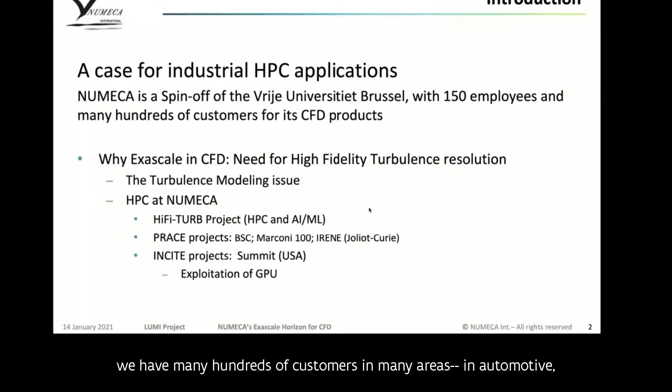So just two words on NUMECA. We are a spin-off of the Vrije Universiteit Brussels, and with around 150 employees today. We have many hundreds of customers in many areas, in automotive, in aerospace, in aeronautics, in marine, and so on.

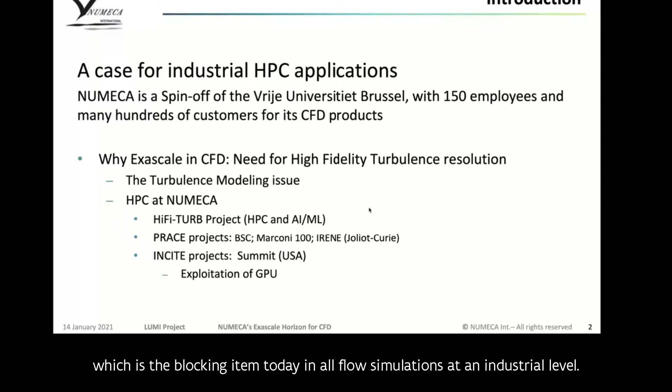I'd like to introduce first what is the issue about turbulence modeling, which is the blocking item today in all flow simulations at an industrial level. Along these lines, we have a large experience in high performance computing through our own developments and through several projects, which I will describe shortly.

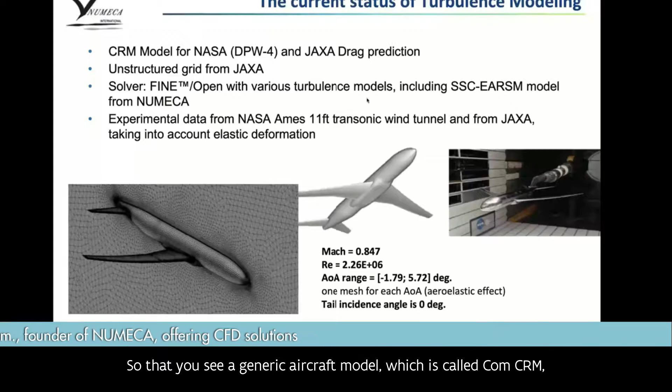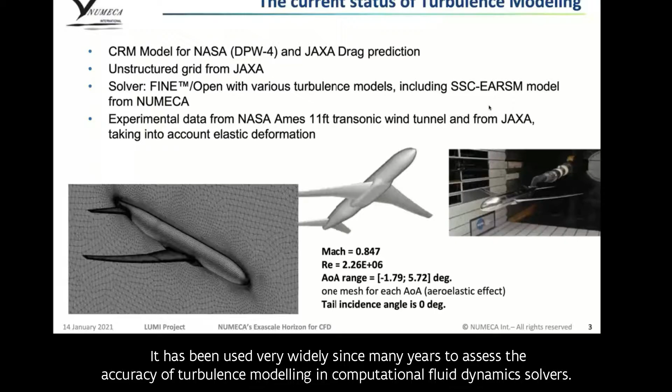Let me move on and show one example of the current status of turbulence modeling. This is a generic aircraft model called the CRM, for Common Research Model. It has been used very widely for many years to assess the accuracy of turbulence modeling in computational fluid dynamic solvers.

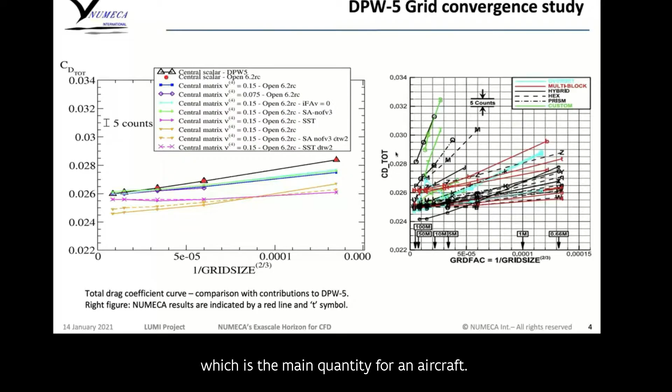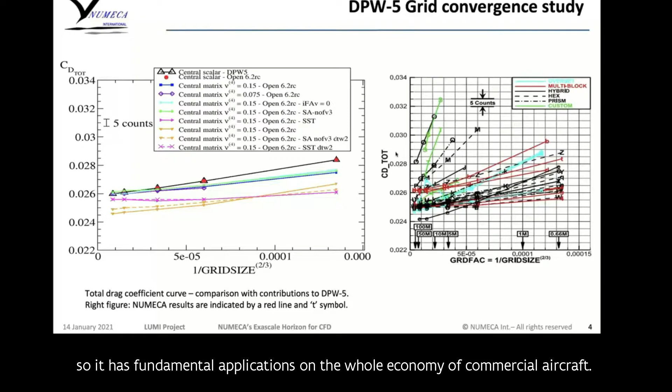If we look at this plot, the issue on the right is prediction of drag, which is the main quantity for an aircraft. The drag will determine the fuel consumption over a flight, so it has fundamental applications on the whole economy of commercial aircraft.

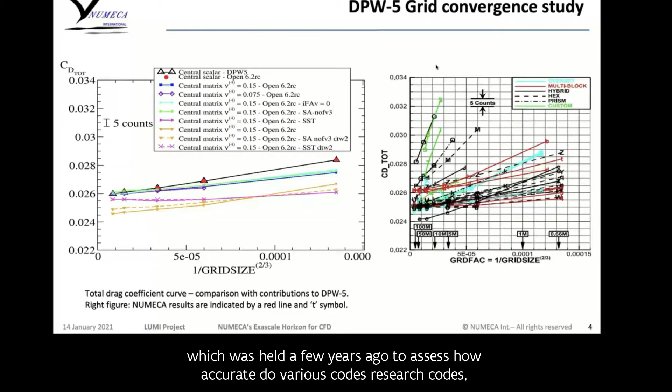What you see here on the right is the output of a workshop held a few years ago to assess how accurately various codes, research codes, commercial codes, predict the drag. You can see there is a wide variation of prediction. Each of these curves is a different code.

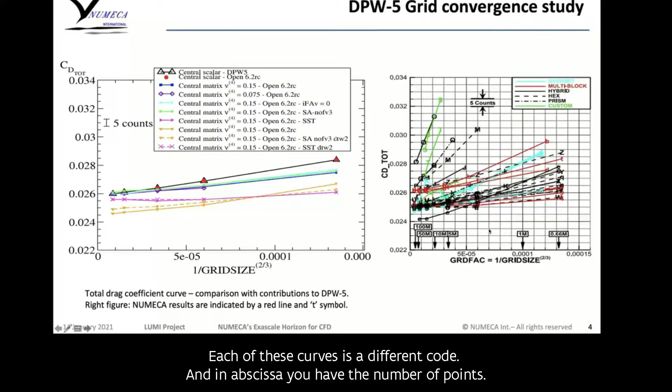In abscissa, you have the number of points. At the lower end, you have a simulation with 100 million points, and some converge. If you look at the values, not all the codes converge to the right value, to the experimental value.

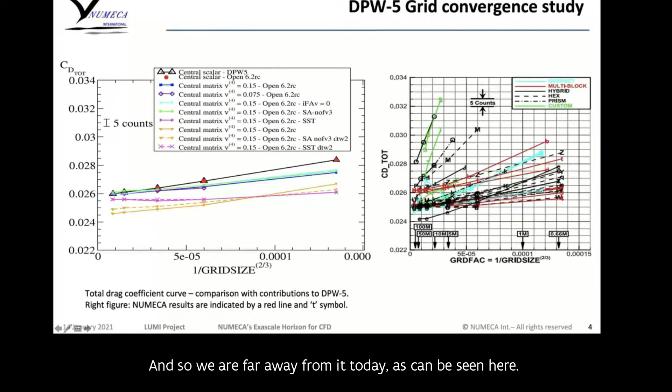To indicate the level of accuracy that industry requires, one graduation, as you can see here, is 5 counts. So 1 count on drag is 1 unit on the 4th decimal place. That indicates the accuracy required by industry, which is of the order of 1 count. We are far away from it today, as can be seen here.

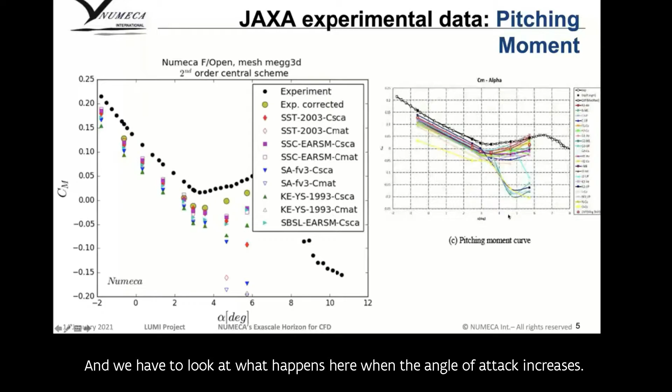If we look at the other curve, which is the moment as a function of incidence, this again is the output of a workshop, giving the discrepancy between various codes. We have to look at what happens here when the angle of attack increases, then there is flow separation.

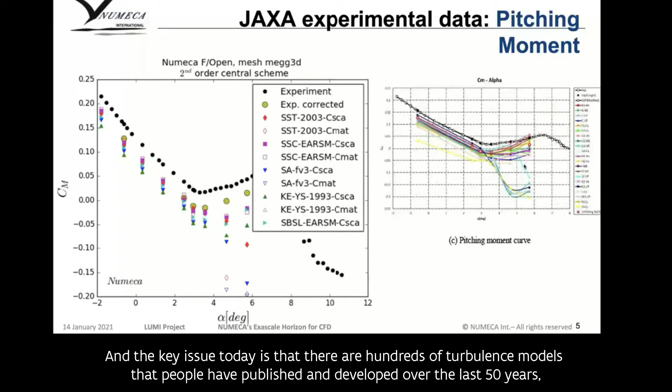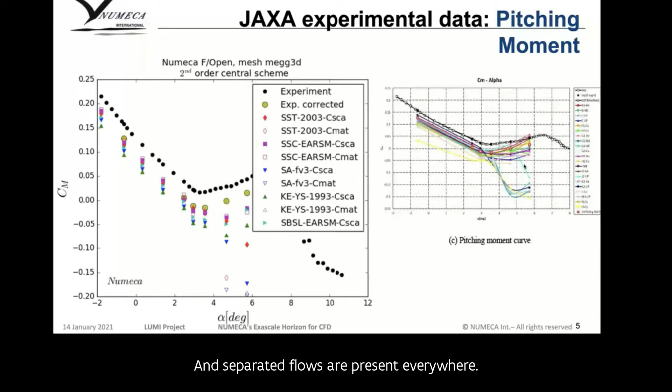The key issue today is that there are hundreds of turbulence models that people have published and developed over the last 50 years, but none of them is reliable when it comes to separated flows. And separated flows are present everywhere.

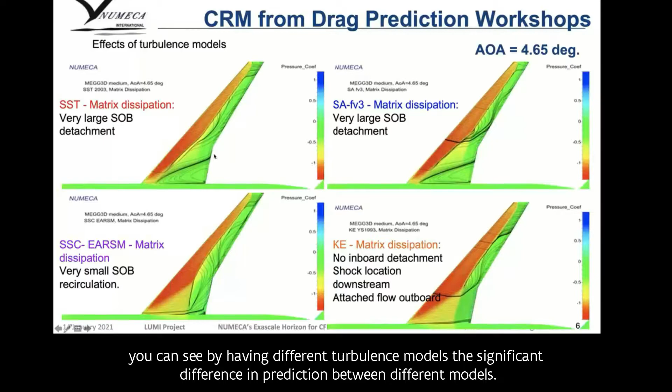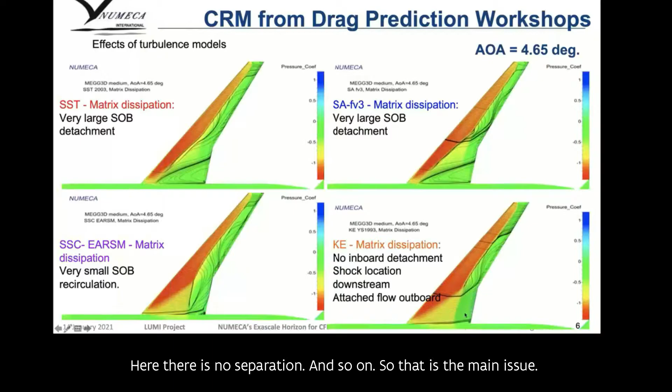If we look at the shear stress lines on the wing, you can see by having different turbulence models, the significant difference in prediction between different models. Here, this model predicts separation at the intersection between the wing and the fuselage. Here, there is no separation, and so on. So that is the main issue.

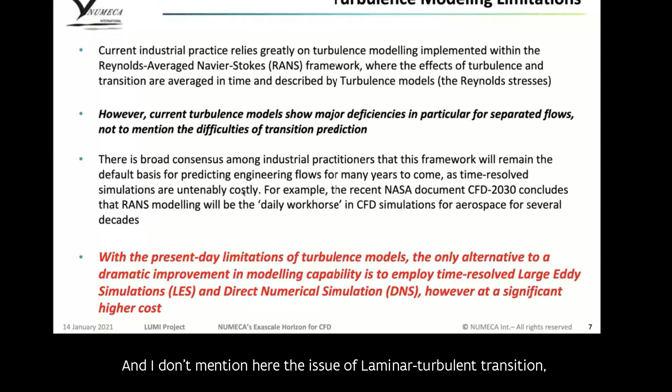So what is the way to go around these limitations, particularly with separated flow? I don't mention here the issue of laminar turbulent transition, which is also very fundamental and very difficult to model. The approach that I showed is called Reynolds Averaged Navier-Stokes, RANS.

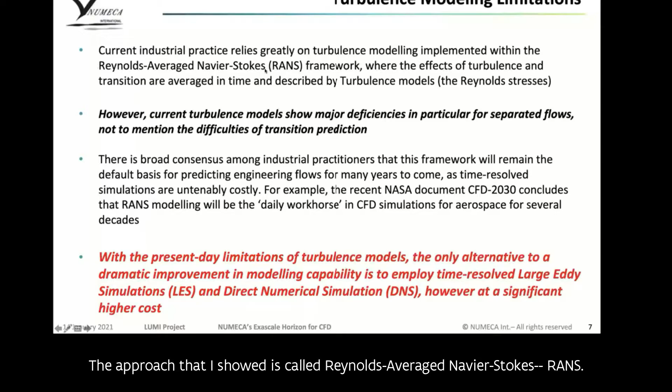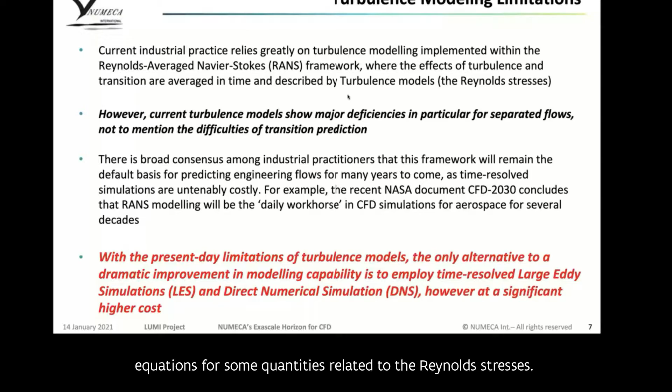This means we average over all the turbulent fluctuations at all scales, and that introduces some quantities called Reynolds stresses. The turbulence models are semi-empirical models that provide laws, or transport equations, for some quantities related to the Reynolds stresses.

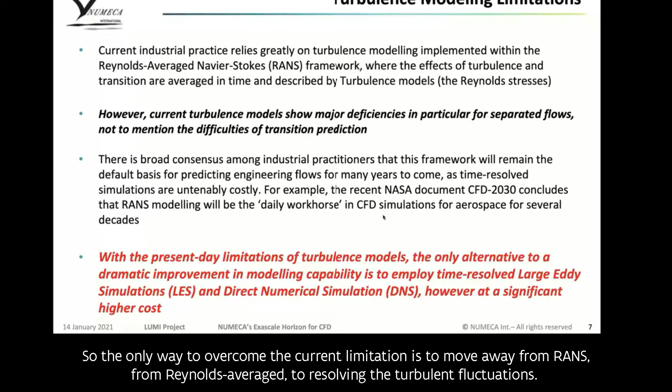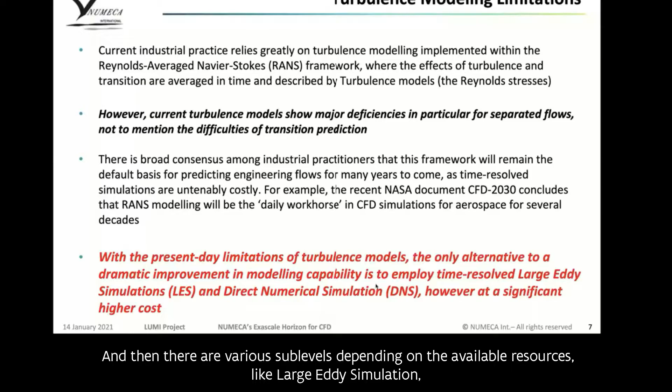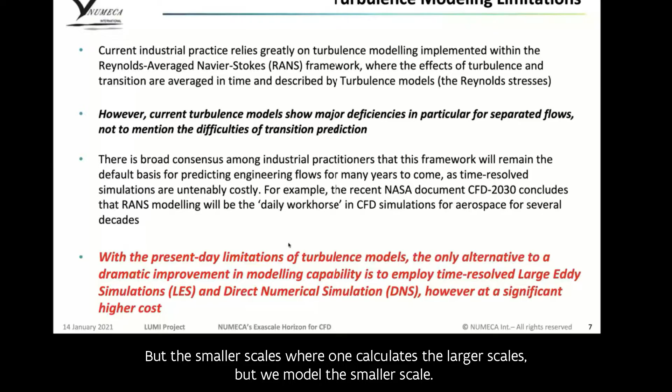So without going into the details, how can we overcome the current limitation? The only way is to move away from RANS, from Reynolds averaging, to resolving the turbulent fluctuations. The ultimate approach is what is called direct numerical simulation, where all the turbulent fluctuations at all scales are resolved by solving the fundamental Navier-Stokes equations. Then there are various sub-levels depending on available resources, like large eddy simulation, where one calculates the larger scales of turbulence but models the smaller scales.

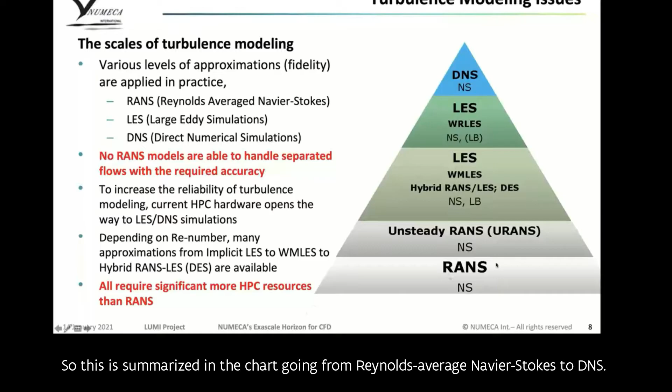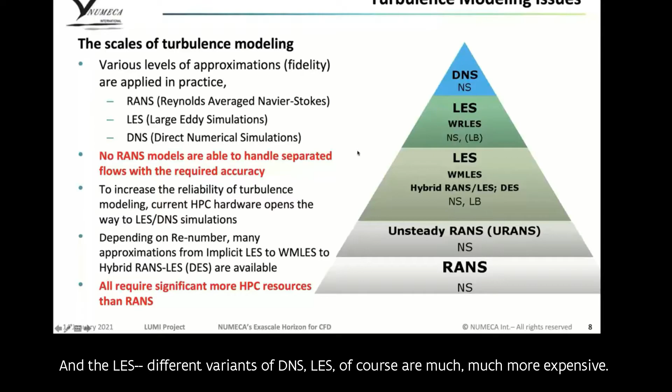So this is summarized in the chart going from Reynolds Averaged Navier-Stokes to DNS. LES, and different variants of DNS and LES, are of course much, much more expensive, and they can be considered only thanks to developing high-performance computing hardware.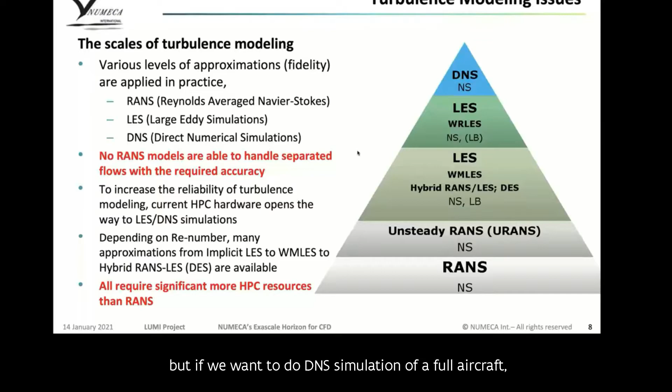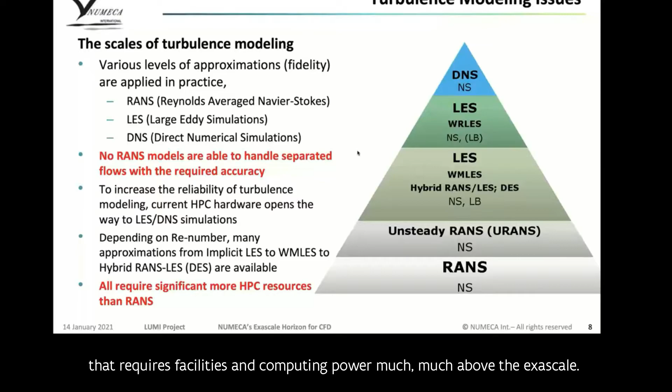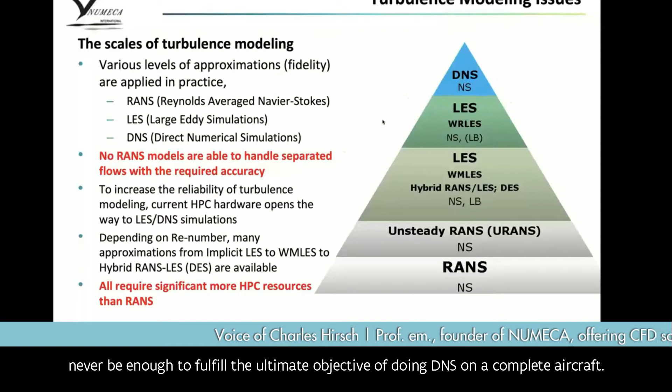As of today, I don't have time to go into details, but if we want to do a DNS simulation of a full aircraft, that requires facilities and computing power much, much above the exascale. So whatever the power of a high-performance computing system, it will up to now never be enough to fulfill the ultimate objective of doing DNS on a complete aircraft.

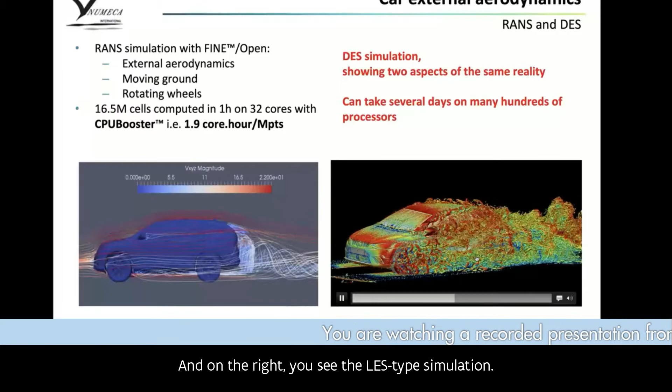But let me show this example of car aerodynamics. On the left, you have the simulation from Reynolds Averaged simulation, where you can see the streamlines and the wake, the vortices in the wake. On the right, you see the LES type simulation.

So these are two aspects of actually the same reality. It depends how you scale, at what level you want to look at the flow. On the right, you have the flow in its closer reality. And if you average all the fluctuations over time, you obtain the vision on the left. So these are two aspects of the same reality - one is instantaneous and the other is average.

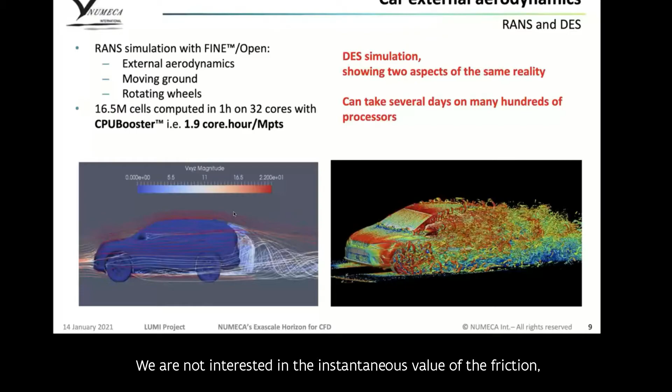But we need the instantaneous simulation today to obtain a more accurate representation of the average flow. And just to put it in a practical standpoint, if we look at an aircraft, the drag of an aircraft and the fuel consumption over flight are averaged quantities. We are not interested in the instantaneous value of the friction, but the average quantity over a flight at a given regime.

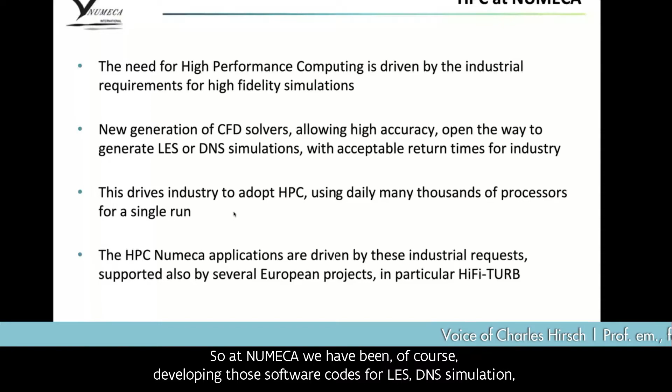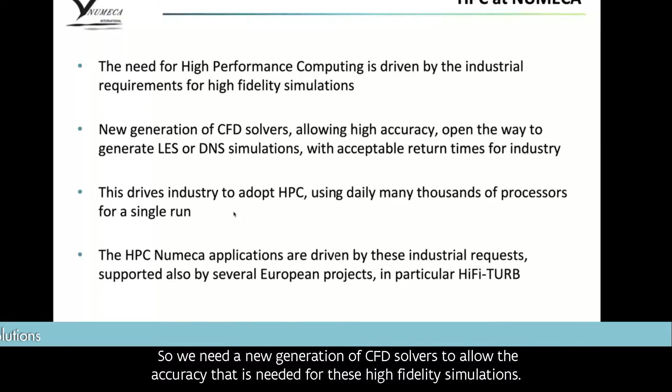So at NUMECA, we have been developing those software codes for LES, DNS simulation, which require high accuracy. We need a new generation of CFD solvers to allow the accuracy that is needed for these high fidelity simulations, and that is a driver for industry to exploit more and more high performance computing.

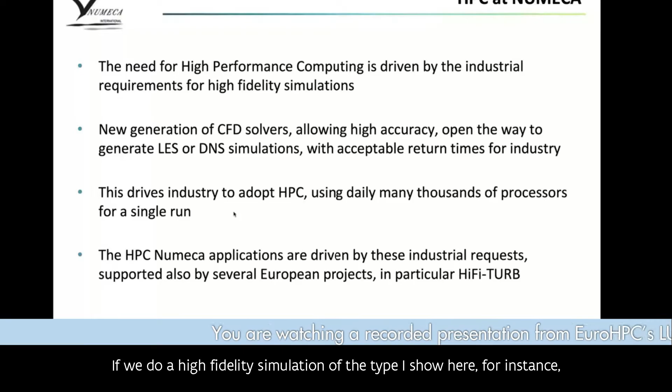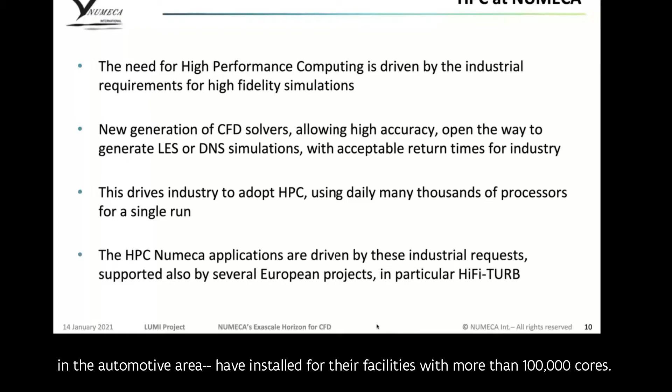If we do a high fidelity simulation of the type I show here, for instance, the industry will accept such a simulation if we guarantee a return time of less than one day, whatever the number of processors. Actually, they don't care if one has to use 1,000 or 10,000 processors. Some of the industries we work with, for instance in the automotive area, have installed facilities with more than 100,000 cores. So that's not the issue.

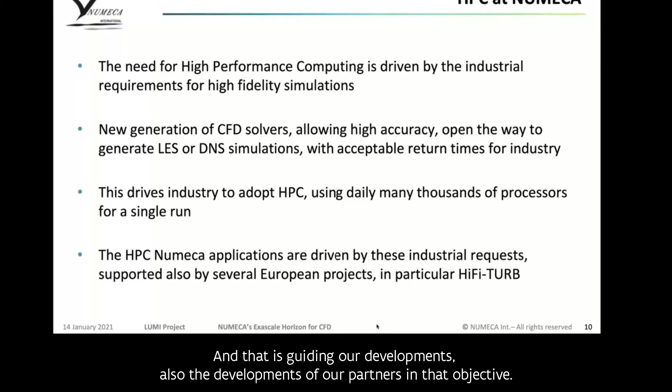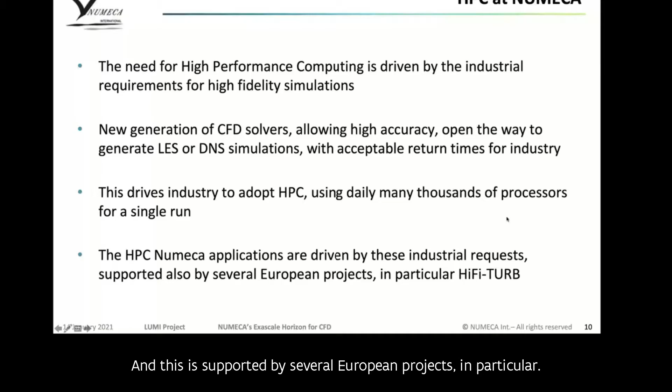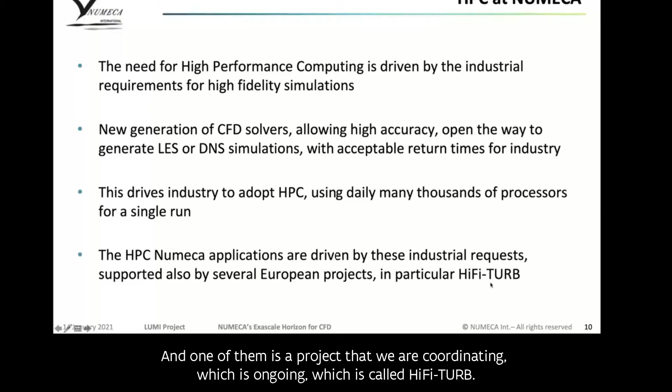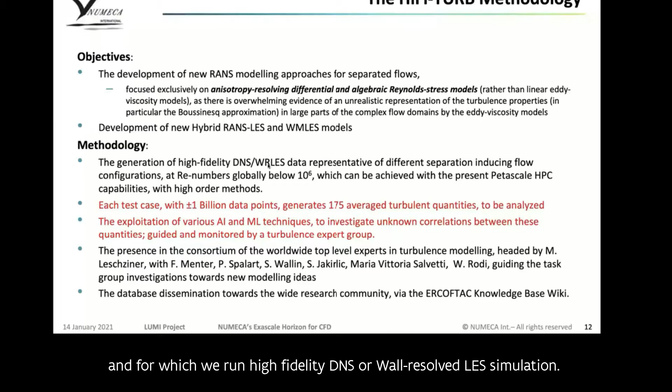The methodology we have put forward is the following: in order to obtain new models with new physics, we have defined a series of test cases, which are all relatively simple, but all have different variants of separated flows, and for which we run high fidelity DNS or wall-resolved LES simulation. That can only be done on the current petascale machines with high order methods.

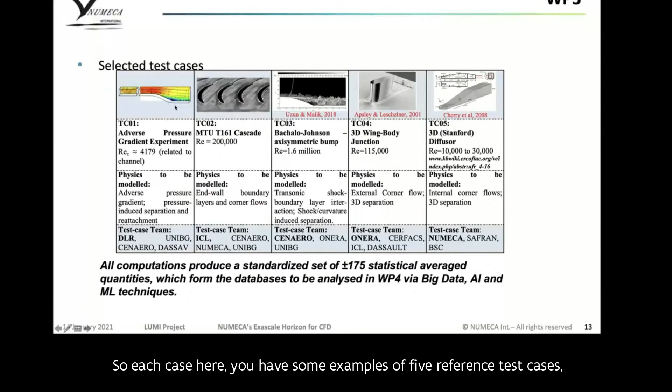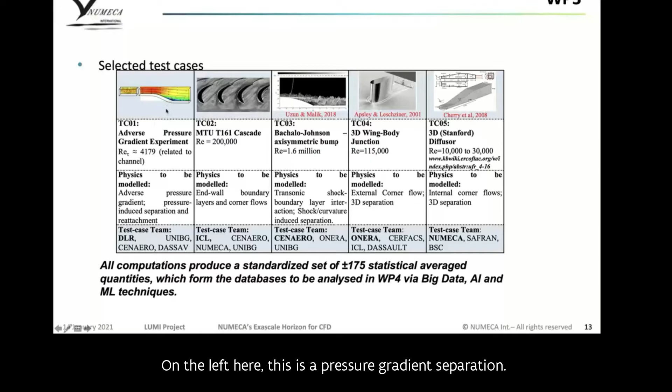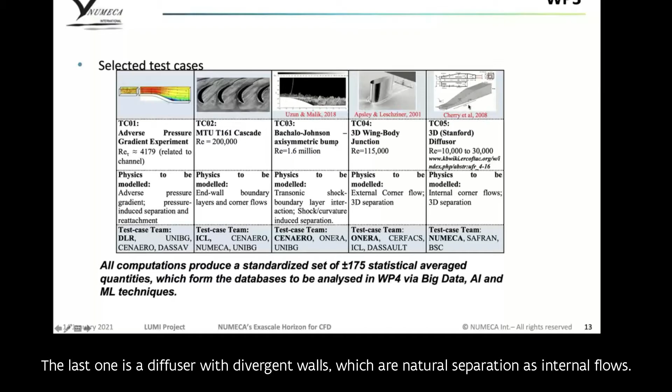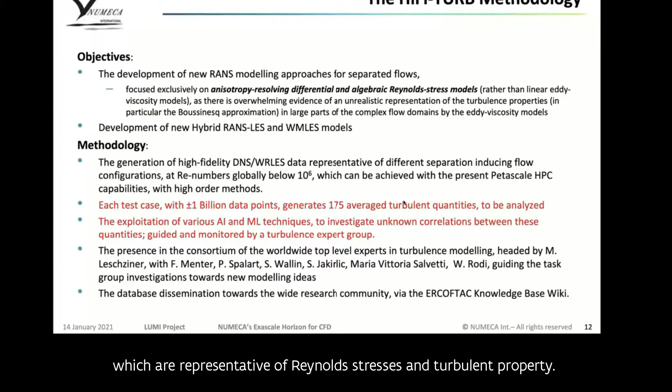So for each of these cases, we run with up to 1 billion data points, and for each test case we extract 175 turbulent averaged quantities, which are representative of Reynolds stresses and turbulent properties, and they have to be analyzed. So if we have a run with 1 billion points, that represents 175 billion data points.

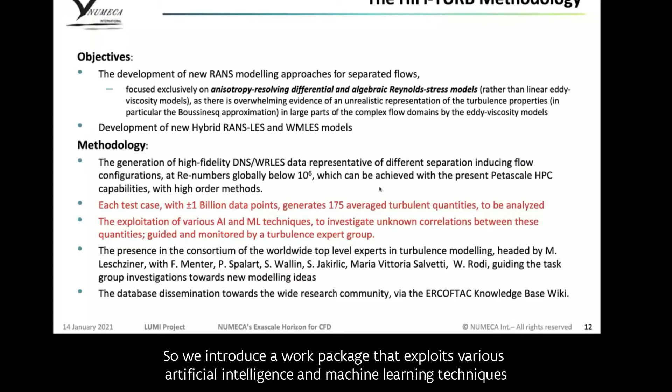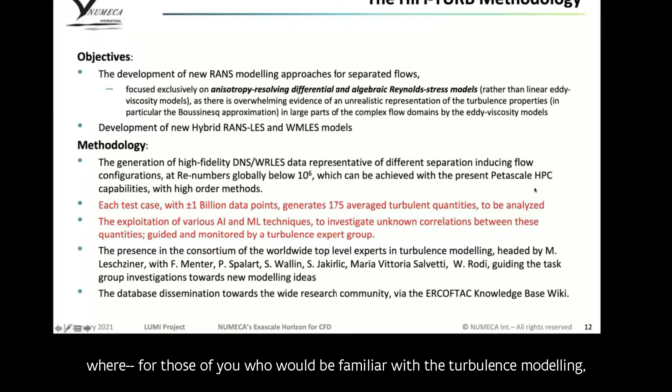So we introduce a work package that exploits various artificial intelligence and machine learning techniques to investigate correlations and to detect and derive unknown correlations between these quantities. This is guided by turbulence expert groups where, for those of you familiar with turbulence modeling, you will recognize the names here of Menter, Spalart, Leschziner, and so on. They are all part of the project.

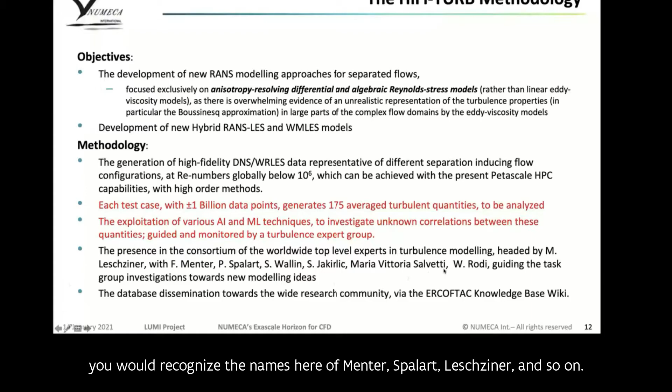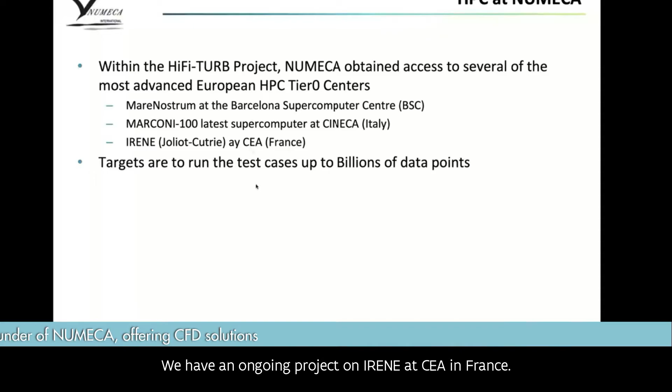Just within that project, we have had access to some of the most advanced European Tier 0 centers. We have been running data on the Barcelona supercomputer, Mare Nostrum. We have currently access to Marconi 100 at Cineca in Italy. We have an ongoing project on Irene at CEA in France. And as I said, we are exploiting the maximum capacity, running billions of points.

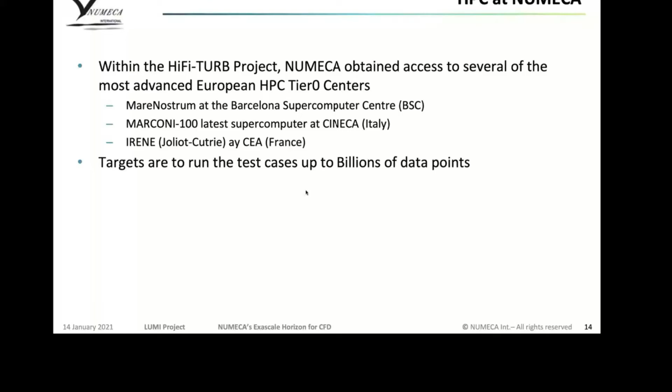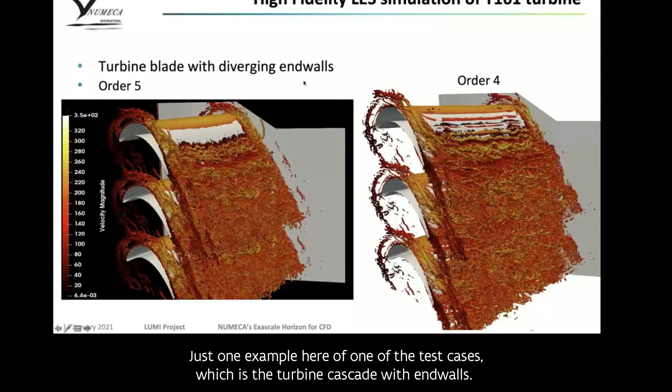Just one example here of one of the test cases, which is the turbine cascade with end walls. If you have never seen the details of turbulence, you can see it here. This is at different orders of accuracy.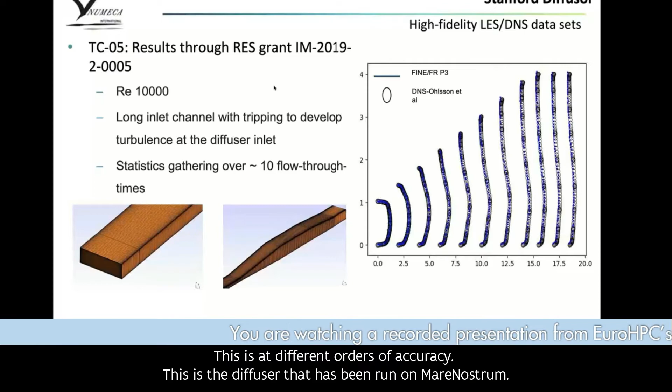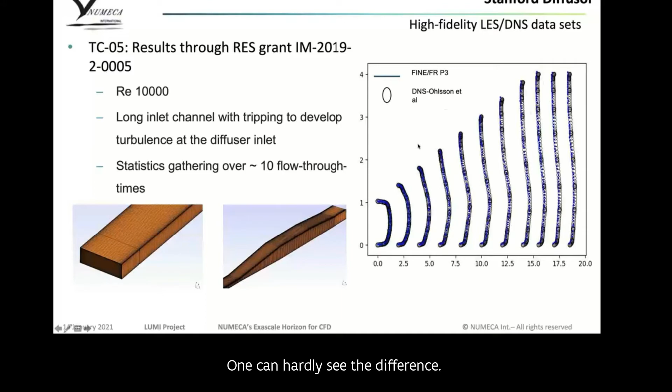This is the diffuser that has been run on Mare Nostrum, and here we compare in black lines our results with the reference DNS results. One can hardly see the difference, so that was quite satisfying that we could check the whole simulation process. And that test case is ongoing now on Irene for larger Reynolds numbers.

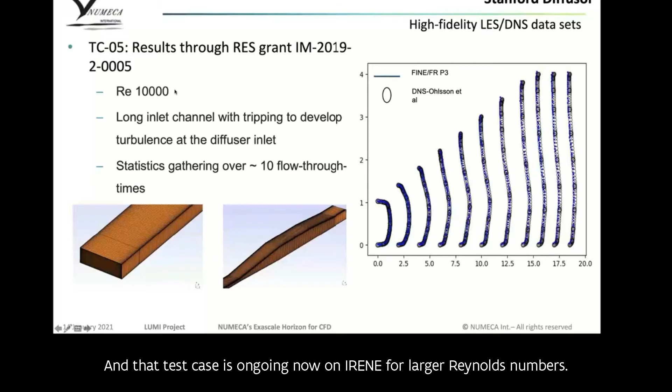And so the last point I want to describe is the INCITE project. That is a current project we have on Summit in the United States. For those who are not familiar, INCITE is the US equivalent of PRACE. It is one of the very few programs in the United States where non-US citizens can apply. And so we have a project ongoing for understanding the instability mechanisms in axial compressors based on a well-known configuration, which is a transonic rotor 37.

So it's a quite challenging project because instability in compressors implies many passages and very complex physics. That is a 2 year project. We are now in the second year. We have 500,000 node hours for this year. And each node has 2 IBM 22 core CPUs and 6 NVIDIA V100 GPUs.

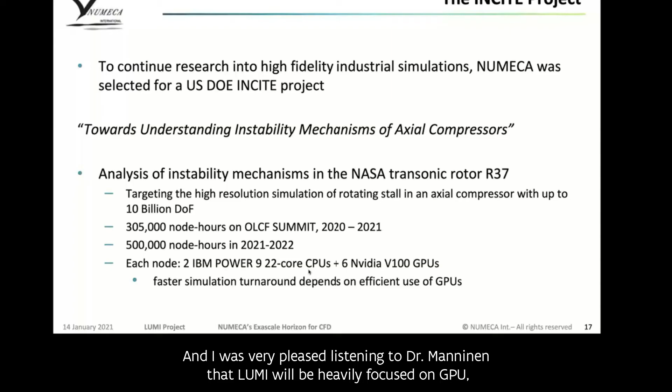And we have been exploiting and are still exploiting significantly the use of GPUs. And I was very pleased listening to Dr. Manninen that LUMI will be heavily focused on GPU because it is very, very important.

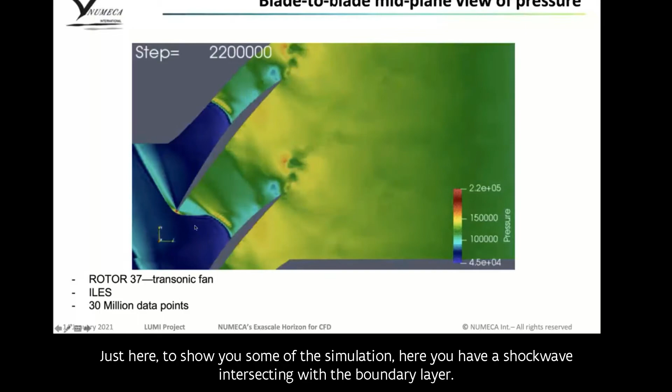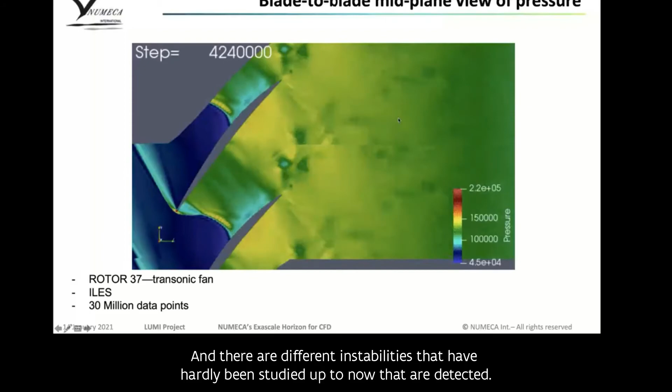Just here to show you some of the simulation. This is a shock wave intersecting with the boundary layer, and there are different instabilities that have hardly been studied up to now that are detected. So it's this high performance computing, high fidelity simulations are highly instructive to detect physics that you'll never see otherwise.

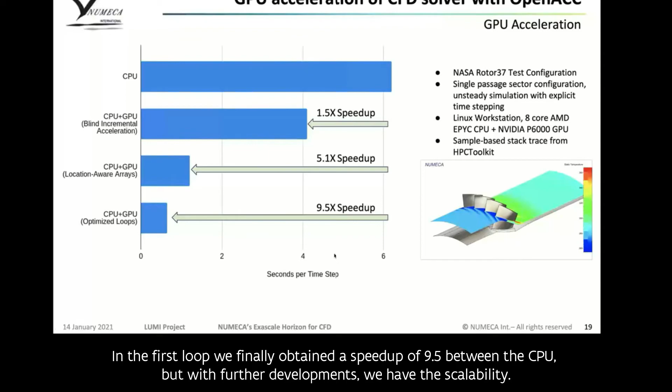And in terms of GPU, we have a very excellent scalability on the CPU, and moving to the GPU at different levels of our implementation. In the first loop, we finally obtained a speed up of 9.5 between the CPU, but with further developments, we have improved the scalability.

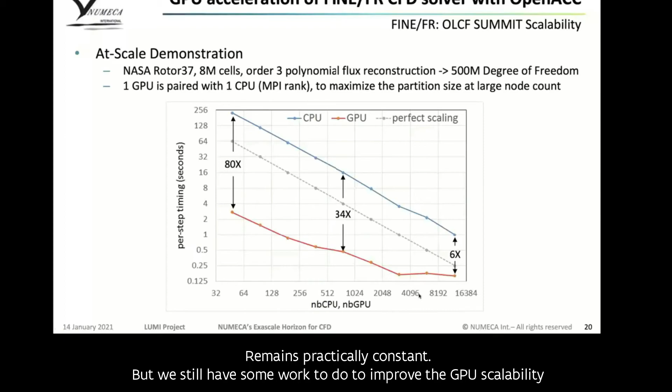And what we can see here is that depending on the number of cores, for low numbers of cores, where we have a large number of points for each partition, we can achieve a speed up of around 80. But when we increase the number of partitions of cores and GPUs, the CPU scalability remains practically constant. But we still have some work to do to improve the GPU scalability when reducing the number of points per partition, and that might be difficult, because once we have too little points, the communication becomes a bottleneck.

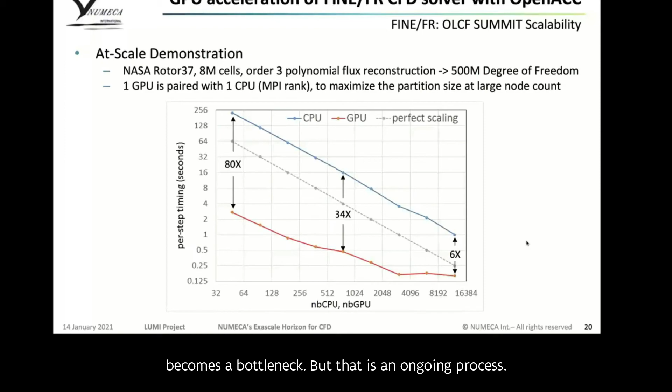But that is an ongoing process. Anyhow, achieving 80x speed up, we were very pleased to see that.

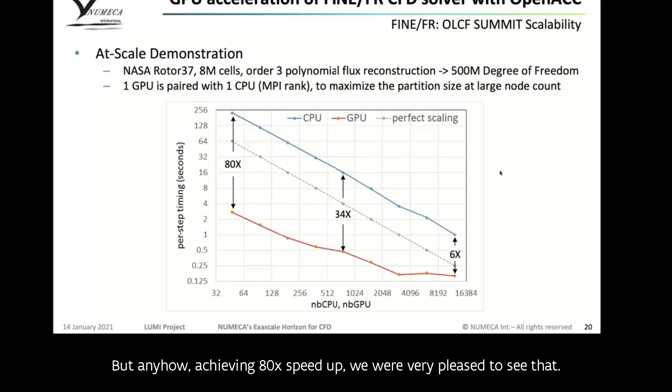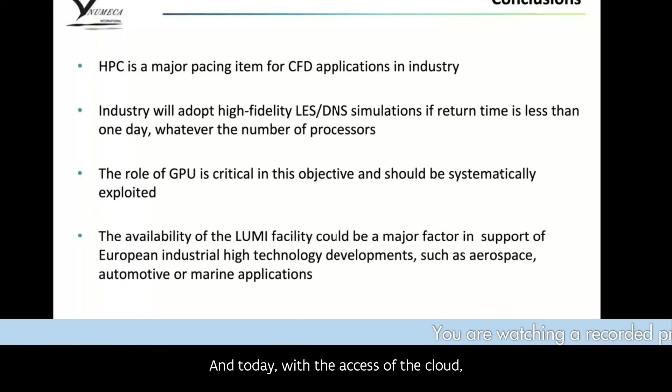So in conclusion, I'd like to emphasize that HPC is a major pacing item for CFD applications in industry. And we know, of course, the importance for research, but industry is becoming more and more aware of the needs. And in the cases I mentioned here of turbulence simulation, the key bottleneck, as I mentioned earlier, is the return time. So I can assure you that we have enough information that industry will adopt high fidelity simulations if this return time is satisfied. And today, with the access of the cloud, it makes the access by industry of high performance computing also more practical.

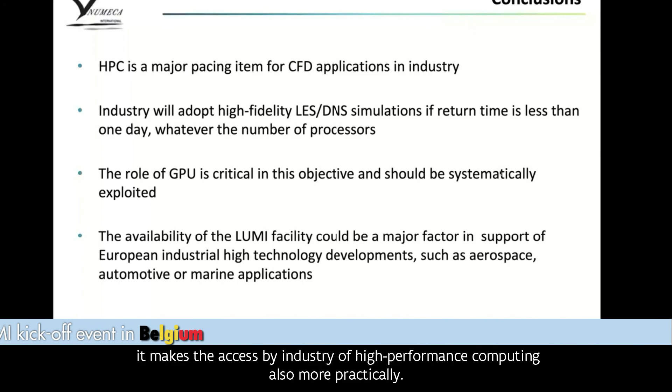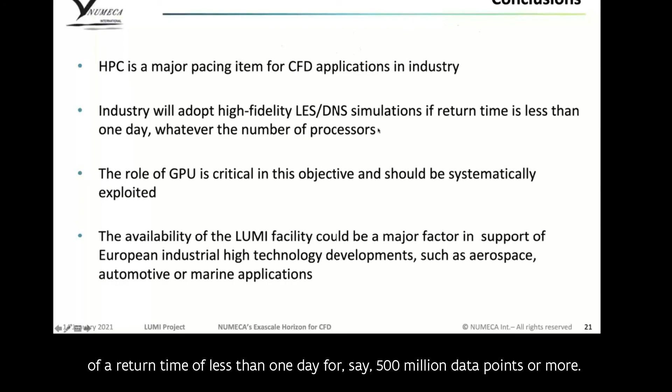And the role of GPU is absolutely essential to match the objective of a return time of less than 1 day for, say, 500 million data points or more. Without GPU, it is just inconceivable. And so we expect that the LUMI facility will be a major factor in support of the European high-tech industry, in a world that is, as we all know, very highly competitive.